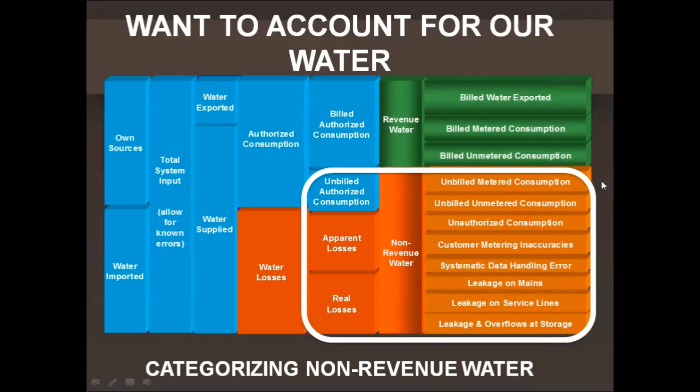So why do we care about real water losses at all? Well, one reason is limited water resources. About a couple of years ago, about 40 out of the 50 states were in a water shortage or drought condition. Many states are still in drought today. It kind of depends on the state whether you're in or out of drought, but most states at one time or another experience a limited drought, some a longer drought. Because water resources can be limited, we really want to make sure we're not losing very much water out of our system.

We can have hazards related to water losses from our system if water's leaking on the surface—we can have ice, ponding, or hydroplaning that might occur. So we want to try to prevent those kinds of things from happening.

With the increasing costs of producing water, including our increased energy costs, it costs us a lot of money to make our water, so we don't want to just waste it out the pipes in our system. We want to make sure we keep as much of that going to our customers.

There can be water quality impacts related to leaks from our water system. If we have any leaks in the system and then a pressure reduction happens, we could potentially suck something into our pipes—we don't want to do anything like that. So we don't want to have any water quality impacts from leaks, or if we have a major pipe burst in our system that collapses and something falls into the pipe that way. We want to try to prevent those kinds of things from happening.

It can be an inconvenience to our customers if we get a major leak—we might have to shut a lot of customers off, block the street while we fix it, and the street may be out of service for a while. And finally, damage to property or other utilities. As the water loss occurs, if we get a catastrophic failure with maybe a sinkhole or something, we could have damage to a road. We might have damage to sewer pipes or other utilities in the same area as our water utility, or damage to personal property.

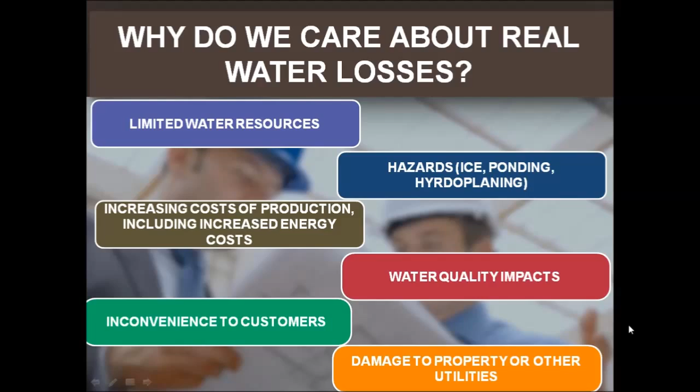Real water losses come in three different categories. First, leakage on mains—this is all the pipes transporting water around your system, moving it from your wells or surface water sources to your tanks, to your industrial, residential, and commercial customers. All that piping network moving water around your system would be considered your mains. So the first part we're thinking about is leakage in any of those types of pipes.

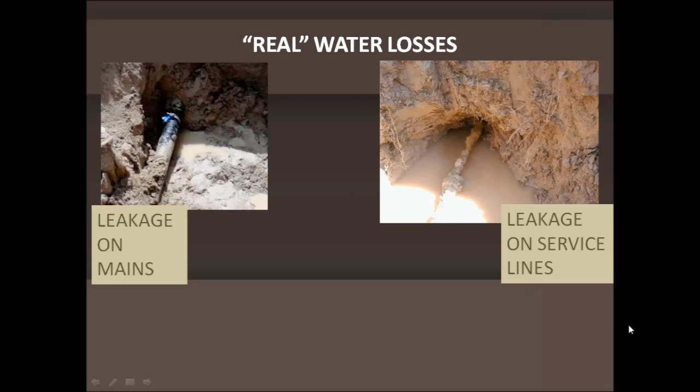The second is leakage on service lines, and in this case we're thinking about the pipes that connect your mains to your customers, up to their meters. So we're not thinking about what happens from the meter back to their house—that's a whole different category that doesn't actually show up in this type of balance.

But we're talking about what connects your mains to the customer meter. And then finally, the last category is leakage or overflow at storage tanks.

Leakage or overflow at storage tanks is a little bit different than leakage on pipes, so we're not going to spend much time talking about this today. We're going to mostly focus on the pipes. It's also handled in a different way.

If you have an overflow at a storage tank, you want to make sure that you think about why that's happening. Are you overfilling the storage tank because maybe there's something wrong with the equipment that's telling you what height of water is in the tank? Do you have some operational problem, a design problem? Is there a malfunction in the tank? You want to try to investigate what's going on with that tank so you can stop the overflows and the loss of water that way.

If the water's leaking out of the storage tank through some structural problem, there's a hole in the tank, something like that, you really want to address that because you don't want any holes in your storage tanks. That's a very dangerous thing and could be a public health protection problem where you don't want anything from the outside washing over the tank and getting into a hole in the tank and then getting into your finished water supply.

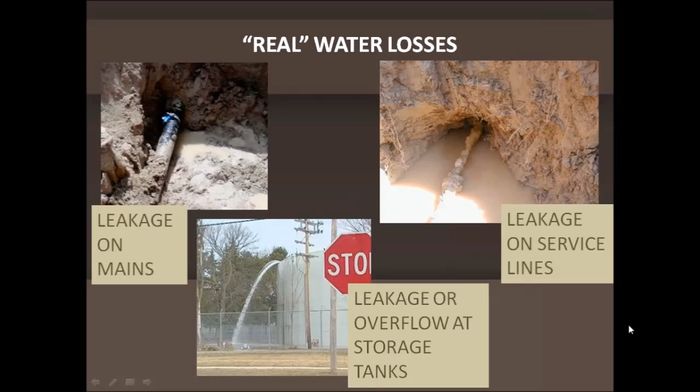So again, the storage tank would be handled a little differently. The overflows, you want to look more at the design and operation of the system, the functioning of your level detectors and things at your storage tank, and the leakage at your storage tank, you want to just inspect the tank very thoroughly. You want to make sure you really have a tank that structurally has good structural integrity and no leaks. So handle that sort of separately. And the rest of the discussion today is going to focus much more on leakage on mains and leakage on service lines.

So the different categories of water loss, we want to think about what our total water loss amount is. And this is real water loss, not that whole non-revenue water. This is just the real water being lost to our system. So we call that the current annual real losses, or CARL, C-A-R-L. So that green box is sort of representing all the water that's being lost to the system.

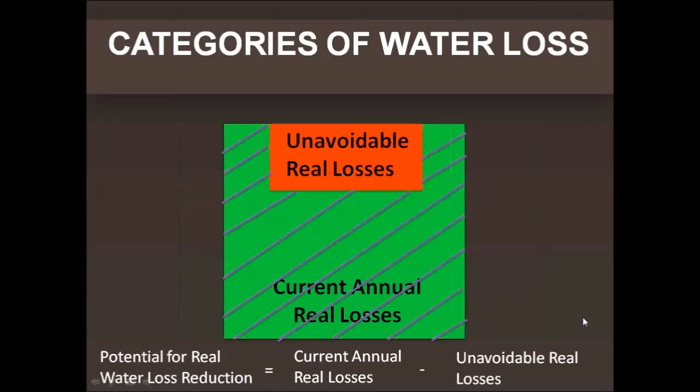And then within that green box, we have something we call unavoidable real losses. These are the losses that we feel like we cannot remove, and we'll talk about what causes unavoidable real losses. So what we actually have a chance to do something about is the area that's sort of hatched in the purple lines. So if you look at all of this area out here, outside the red box, this is all the potential to reduce the real water losses.

You have to go in and look at your particular situation. How much does it cost you to produce that water? How much does it cost you to, or what are you selling that water for? What would it cost you to reduce the losses? So you can do a cost-benefit analysis and say, it would cost me this much to reduce it, and it would save me that much money if I did, so what's economically justified?

And it's always available to a system to do more than what's economically justified. If you're in an area where water resources are very, very precious, you may go well above the economic level just because there are other reasons you're justifying it. But it's important to remember that there are these different levels. There's the current losses that encompass the whole real water loss. There's the unavoidable real loss that we really have more difficulties dealing with, and then there's what's economic to reduce.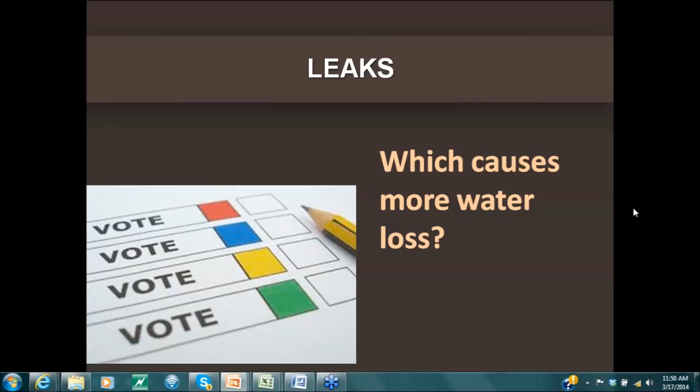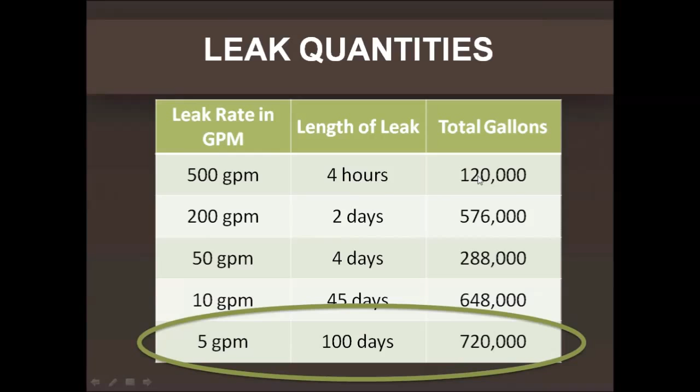So what many of you figured out is here's the leak quantities if you actually do the math. If you look at your 5 gallon per minute 100-day leak, it produced a water loss of 720,000 gallons, whereas the very major leak, although it's huge, it was a short duration, so 120,000 gallons was produced out of that loss.

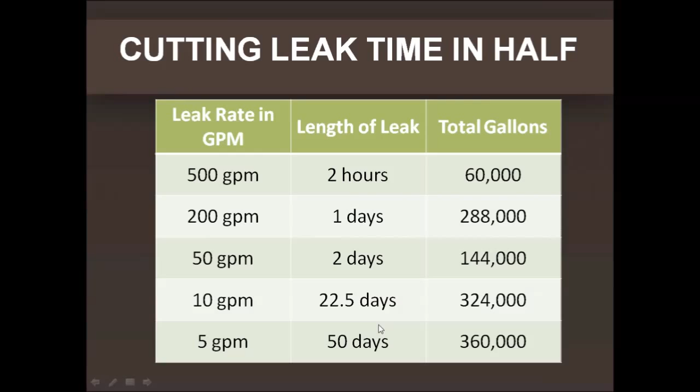What this is all about is looking at if you could cut the leak time in half, how much water could you save? If we could respond twice as fast as before, each one cut down in half, we could actually save 1,176,000 gallons for these 5 different break types. So the point here is if you respond faster, you do have the potential to save a lot of water loss. We really want to make sure we can respond as quickly as possible to the breaks that occur, because ignoring a slow leak because we think it's a small matter and it won't make that much difference—we want to change that thinking.

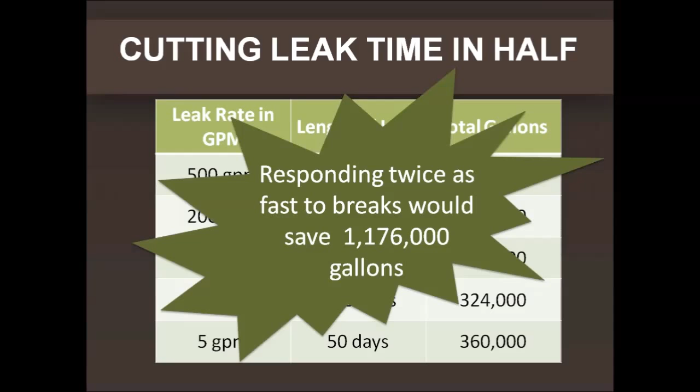So another poll question is, what reasons do you have for why you haven't repaired leaks sooner? What kinds of things happen in your system that make it more difficult for you to make repairs in a timely fashion? You can select all that apply. So we have maybe small leaks that don't matter that much—you think, if it's a small leak, we don't really have to get out there very fast. Or insufficient staff, inadequate resources, maybe we don't have enough money or equipment or supplies. Maybe we have other priorities, prioritized by myself or management, where you have other things you have to do and can't get to water losses. Or you have a large water supply, meaning you have a lot of resources and you're not too worried about water losses because you have that big water supply. So take a few minutes and click the ones that you think best describe your system and why maybe you don't fix leaks more rapidly.

Okay, so it looks like some of the biggest reasons are insufficient staff, which I can imagine is a very big reason because a lot of systems are really short-staffed. Inadequate resources, lack of money, or other priorities—those seem to be things that we hear a lot of in lots of other contexts as well. But those are major things that often prevent us from doing other parts of our job.

So we can go back to the slides now. Maybe think about if your system has a lot of smaller losses and it does take you a long time to get out to fix them, maybe think about what kind of case you might be able to make to have a more rapid response. Maybe you can make your case to your decision makers, the people that have the budget in hand, or your managers, the people who tell you what to do during the day, to make a case for getting out there a little faster.

So the kinds of things you can use are: small leaks adding up to a lot of water—we talked about that in the prior poll about how important it is to realize that small leaks can add up to a lot of loss. Your system integrity is compromised as long as you have leaks going on, so you want to try to fix them as soon as possible to avoid any problems related to public health.

We want to avoid a more serious and expensive repair later. If we fix it now as a small leak and do it quickly, we might be able to avoid a much more expensive repair when a sinkhole occurs or a catastrophic failure occurs, because some research has shown that many of those catastrophic losses start out as a very small leak and then grow bigger. So we want to try to fix them before they grow bigger. And it's less expensive to repair pipe than to replace it—if we get out there sooner, maybe that can help us avoid having to replace pipe.

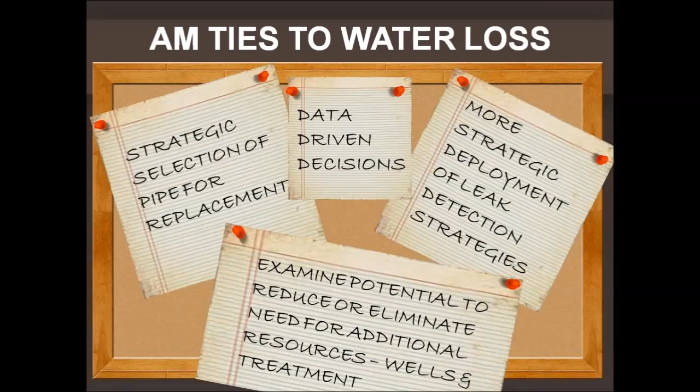So the asset management ties to water loss are pretty strong. We take away from the asset management process that data-driven decisions are really important. We'll focus a lot more on that in webinar 3, on how you use the data from your system to drive decisions on what to do to reduce water losses.

It can also help you with more strategic selection of pipe for replacement. So rather than going in and replacing a whole big swath of pipe or a certain area of pipe or certain type of pipe, you can actually be very strategic, and it can save you a lot of money if you can really strategically select those pipes for replacement based on your data.

You can also use it to have a more strategic deployment of leak detection strategies, thinking about what's the best expenditure of funds to achieve the greatest results I can with my leak detection strategies. And again, that will be discussed pretty heavily in webinar 3.

And then examine the potential to reduce or eliminate the need for additional resources. So maybe you're looking at putting in a new well and need treatment for that well, but it turns out if you reduced your water losses significantly, you could avoid having to put in that new resource or that new well. That could save you quite a bit of money if you can look towards things like that. So sometimes you can look at the potential that maybe you can avoid having to spend money on a particular asset and make the case there.

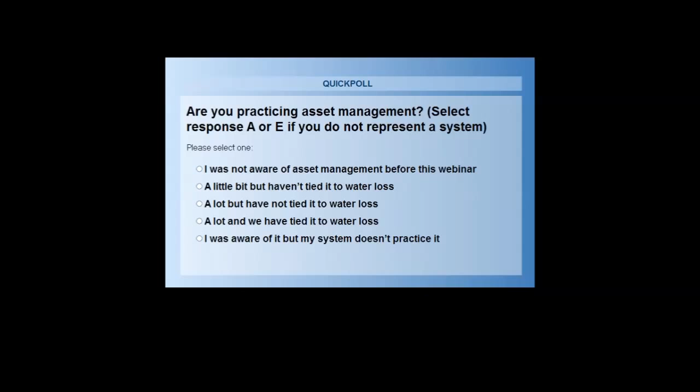So a poll question on whether or not you're practicing asset management. If we could go ahead and open the poll. Okay, so you have your choice of selecting which response best fits you. If you're not representing a system, you can either choose answer A or E.

So I was not aware of asset management before the webinar. We've done a little bit. We haven't really tied it to water loss. We've done a lot, but we haven't tied it to water loss. We've done a lot, and we tied it to our water loss program. I was aware of it, but my system doesn't practice it. So choose the answer that best reflects where you are right now with your system and what your asset management practice is like.

Okay, we still got folks clicking in, so I'll wait a few more seconds before closing the poll.

All right, so we have many people who are aware of it, which is kind of nice. If we would ask this poll question a few years back, I think that answer would be a lot lower, where people weren't even aware of it. We have two groups, about 20% of us, that have done a lot. Some have tied it to water loss and some not, but that's really good to hear that we are starting to see a little bit more asset management practice occurring. So that's really good to see. And then 11% not aware of it. So I might recommend that if you're in that category and you want to learn a little bit more, there's quite a bit on the EFC Network website about it. And you can always contact us about where to get resources and whatnot to learn a little bit more about asset management.

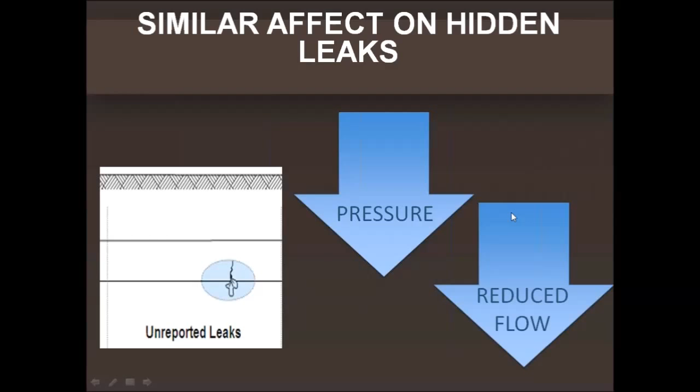And depending on how much background leakage you have, this can be very dramatic. There are certain parts of the world where they've had unbelievable reductions in water losses by reducing the pressure. Places where they've had maybe not the best construction, long run lengths of pipe, and they've had a lot of background leakage, and they've dropped the pressure either all the time or just at night, and they reduce that background leakage quite a bit. You can also have a similar effect on your hidden losses. If you reduce your pressure, you will also reduce the flow out of those hidden losses, the ones that you don't see. And finally, if you reduce the pressure, you'll actually get fewer breaks of the reported type as well, and fewer of the dramatic breaks.

Now, there are some considerations with reducing the pressure. One is many states, if not all, have a minimum pressure that they require just for public health purposes, because you don't want the pressure in your pipe to fall too low, because then you might suck something into the pipe. So they usually set a pressure minimum of possibly 20 or 30 psi. So you need to make sure that you're well above that minimum pressure to maintain public health and safety with your pipelines.

But what we're talking about is you don't need to be maybe up around 80 or 90 psi. Maybe you can drop it down. But what you want to look at is your particular system. You want to see if you have one pressure zone or many. You want to see if you might be able to reduce the pressure in a given pressure zone or throughout the whole system. You might want to think about, could you reduce the pressure at night? Again, you have to maintain that minimum pressure, but is there a way to reduce a little bit of the pressure at night to reduce the losses that occur then? You have to look at your system and see how realistic it is for you.

Do you have pressure reducing valves in your system? Do you have pumps that can be throttled, using variable frequency drives to change the pressure? Or would you actually have to swap out your pumps or do something else to reduce the pressure within your system? And then how automatic is the control of your pressure reducing valves? It may not be that easy for you to reduce pressure at nighttime if you don't have automatic controls on your valve. So you do have to look at your system, but it's something you definitely want to investigate. If you're running at a relatively high pressure and you have a lot of water leaks, you may be able to reduce that somewhat by reducing the pressure in your system. So at least take a look at that and see if it's a possibility within your system to have an impact with pressure reduction. You do want to make sure, again, that you're maintaining the minimum pressure and that you're providing enough pressure to make sure that the customers are getting what they need at their household.

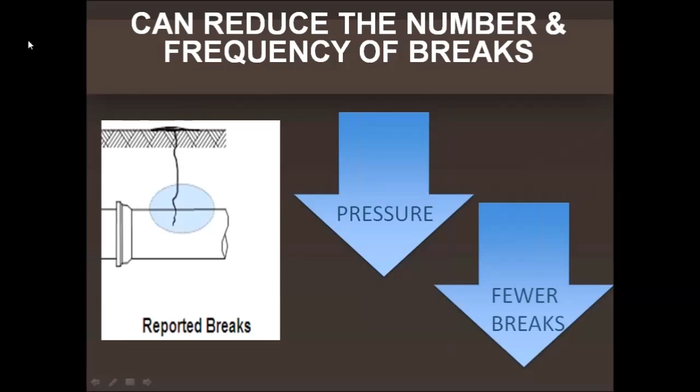So we have a question now about pressure management. Do you do anything with pressure management in your system? Your choices are, and you can check all that apply: you've reduced pressure throughout the system to reduce losses, you've reduced pressure in some pressure zones to reduce losses, you've reduced pressure at night, you've experimented but not fully implemented it yet, or it does not apply because you do not represent a system, or you've just never done anything along the lines of pressure management. So choose the one that best fits your situation, or choose the ones that best fit your situation if you've done more than one of these things. Go ahead and click.

Okay, so we haven't done a whole lot with pressure management. There's a few that have experimented, a few that have reduced it in some pressure zones. So we're not doing a whole lot with pressure yet. I'm not terribly surprised because I don't think the practice of pressure reduction is all that commonplace in the United States, but it is becoming increasingly more common throughout the world, where people are using this as a very good technique to address those background losses, because it's really one of the best ways to take care of that particular problem. Okay, we can go back to the slideshow now.

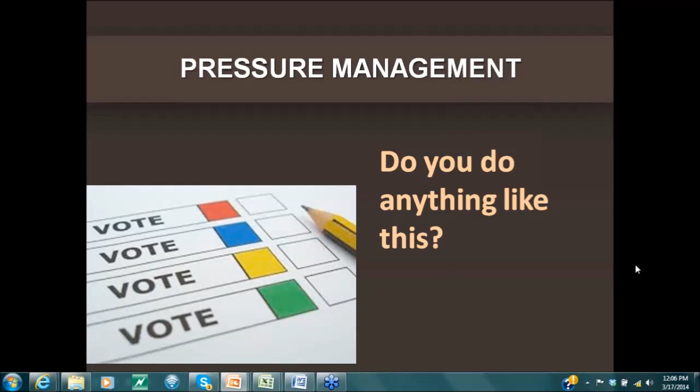Because we've done some work in this area trying to figure out whether leaks would always surface and how many were actually observable versus hidden. And we even watched a couple of leaks that were very low volume leaks for a number of years to actually see if they would ever surface. One, I think, was 2 years and one was about 1.5 years before we decided to finally fix them. And they never did surface, never caused any problem. There would have been no way you would have known it was there without looking for it.

So the kinds of things that keep them hidden are stuff like fractured bedrock or highly permeable soil, or other things like water going into a drain or a sewer. We actually had one where the water pipe had a hole in the bottom, and it had actually drilled a hole in a sewer pipe that was down and over from it, and there was a hole in the top of the sewer pipe, and the water was going into the sewer. So until something catastrophic happened to the sewer, we probably wouldn't have found it because it wouldn't have caused a sinkhole. But eventually it might have caused a problem in the sewer pipe, and we probably would have found it that way. But it's the kind of thing you're not necessarily going to find soon, or at all maybe.

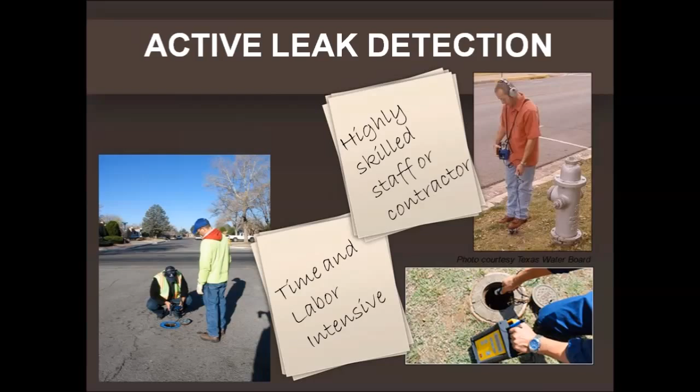This has a magnet. It could be put on a valve and taken off. And essentially what happens is the device listens in the middle of the night. It listens for the noise at, say, 2 o'clock in the morning, and then if it hears a noise, it stays on. If it doesn't hear a noise, it shuts off for the night.

If it hears a noise, it'll come back on at 3 a.m., listen again. If it hears a noise at that point, it will listen again at 4 a.m. If it hears a noise then, it'll go into alarm mode.

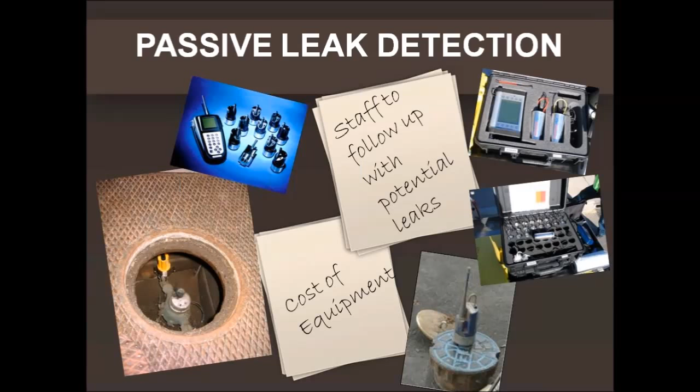And then it takes a person to come back and pick up the alarm signals, see what equipment is in alarm, and then determine which 2 points seem to bracket the noise or where the noise seems closest to. And then you have to follow up with those alarms. Just because this device or that device or any of these devices goes into alarm mode doesn't necessarily mean there's a leak there. So it does take staff to follow up and make sure there's a leak.

So when you're considering active or passive, neither one is a panacea. Neither one will find everything you're looking for. They have pros and cons, and we'll talk a lot more about this in webinar 3 about why you might choose to do one or the other. In the first case, active listening, you're paying more for the person who's going to look around. In the second case, passive, you're paying for the devices. And it depends on how long the devices stay in service and how you use them, whether or not it's cheaper for you to use a person or the devices.

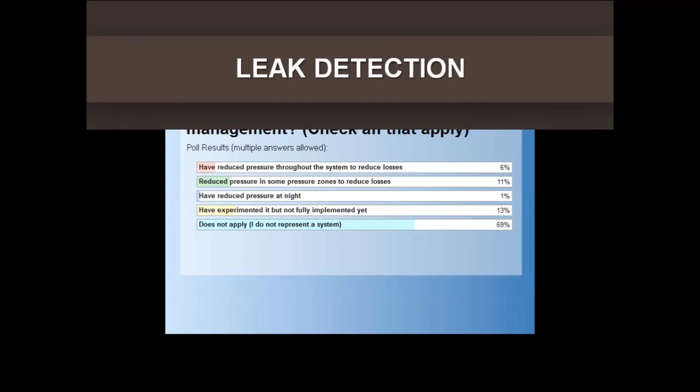So have you done any type of leak detection? Have you hired a company to do leak detection? That means active leak detection, hiring a company to walk around and do active leak detection, or hiring a company to do passive leak detection. Did you buy equipment to do active or passive leak detection? Or have you never done leak detection, or you don't represent a system? Take a moment and pick the ones that apply.

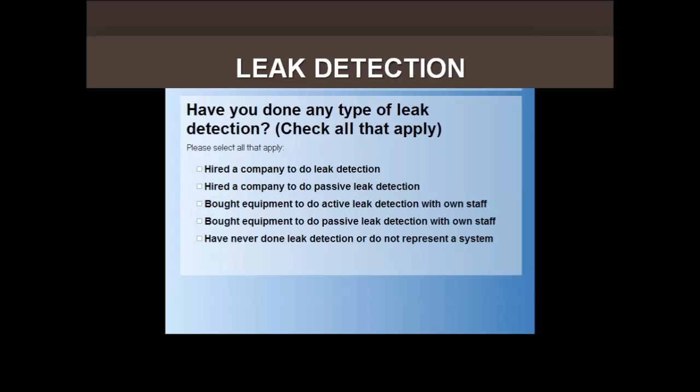Okay, so we have many that have never done leak detection, 68%, and then we have some that have hired somebody to do leak detection, and some that have bought equipment to do it with their own staff. We'll talk a lot more about this in webinar 3 about how you make those choices about which of these strategies to apply and how to apply them to your individual situation.

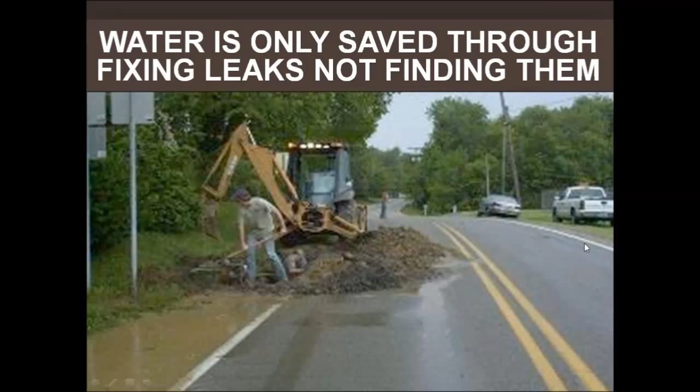Okay, so one last thing about finding leaks: water is only saved through fixing leaks, not through finding them. So really think about the capacity you have to fix leaks. If somebody goes out and finds you 30 leaks, could you actually fix them? Do you have the staff, the equipment, the time, the resources to actually invest in fixing the leaks? Because if you don't have the ability to fix the leaks, it's not worth investing in finding them. Finding leaks is not saving water. It's fixing the leaks that's saving water.

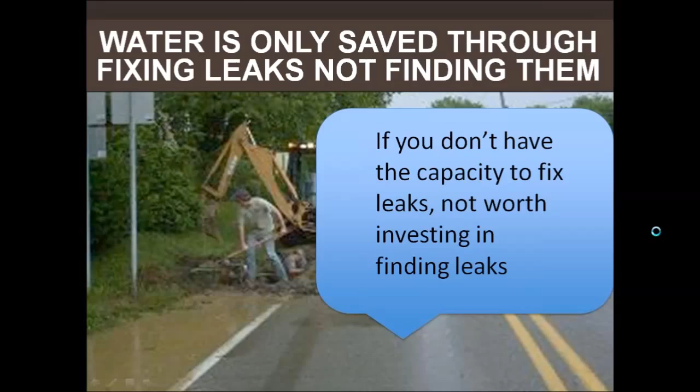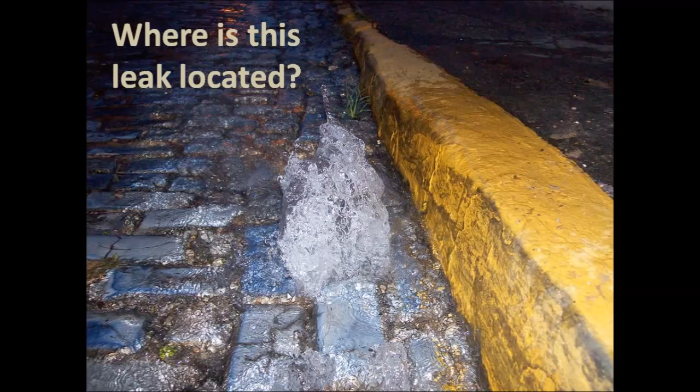So when we get into pinpointing, one of the things we think about is where's the leak located? This is a picture I took when I was doing some asset management training in Puerto Rico. I was walking along and I saw this water bubbling up through the street, and you could tell there was a leak in the pipe. But you don't know where the leak is. The leak might be right underneath this, but it might not, because water is going to seek the path of least resistance. It could run along the pipe and then come up at another point. So you can never be absolutely sure that when you see the leak surfacing, that that's where the actual leak is occurring. So we have to do what's called pinpointing the leak.

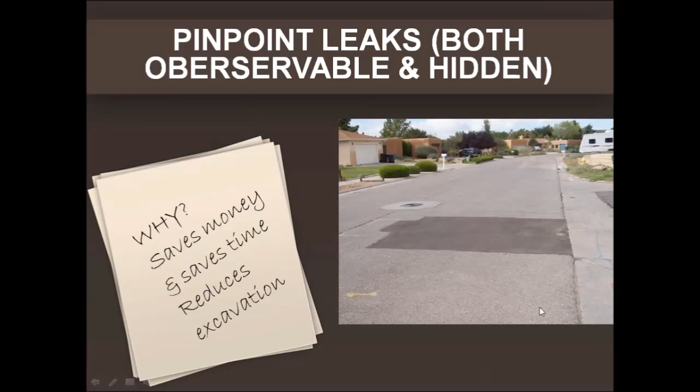We use pinpointing on both leaks we can observe and ones that are hidden. It's even harder with a hidden leak because you have no clues whatsoever. But in both cases, we want the ability to pinpoint where the leak actually is occurring. Why might we want to do that? It's going to save us a lot of money and time by reducing the amount of excavation we have to make. If we can have a nice small excavation like is shown here, it can save us a lot of money instead of having to dig up a whole big section of the street. That could save us a lot of money and time.

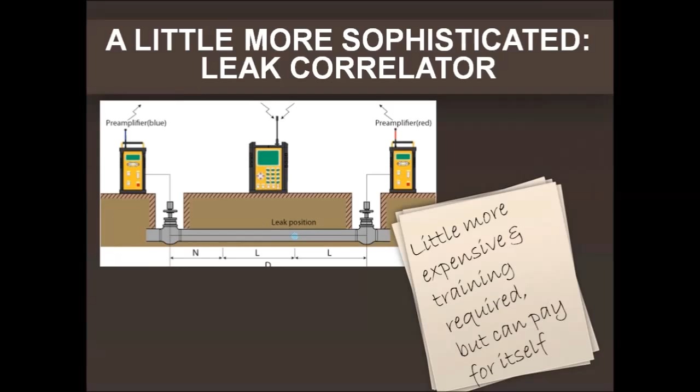If you don't know so much of that information, it can be a little bit challenging because it'll throw you off, since you might put in the wrong pipe type or size. But this is a really good piece of equipment to help you locate those leaks. It is expensive and you need some training, but it could pay for itself in several different big excavations.

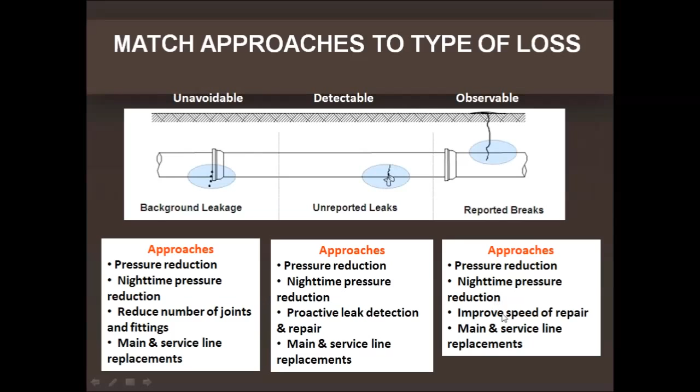This will pay for itself by limiting the size of that excavation. So keep in mind that although it's expensive, you can save money in the long run that can help pay for it. So we want to match our approaches to the type of loss that we have. We go back to our unavoidable, detectable, and observable categories. For unavoidable loss, we're going to do pressure reduction and reduce the number of joints and fittings in our pipe. Occasionally we'll have to do main or service replacement when the background leakage gets too bad. For unreported leaks, we'll use many of those same techniques, except we'll add in proactive leak detection. And finally, for the observable leaks, what we're really interested in is improving our speed of repair to cut down on the water loss we have.

Strategic deployment of those 4 different strategies, and how you make choices within your own system, will be the focus of webinar 3 - what considerations you have, how you should make those choices, and what kind of information you need to collect. That's what we'll talk about on the next webinar.

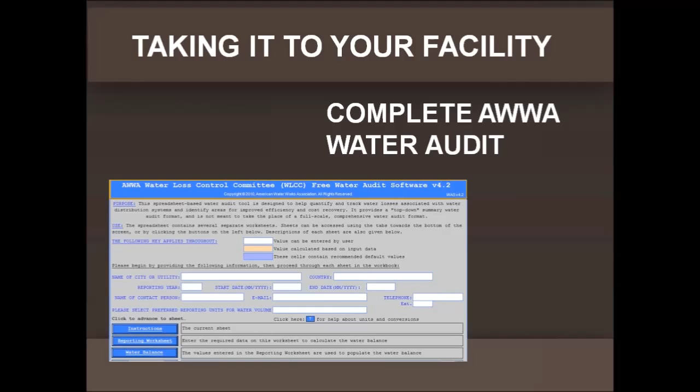So to finalize the discussion, we'll talk a little bit about doing things in your facility. Develop a team, people that can help you get this done. Complete an AWWA water audit to try to see what kind of problem you're actually having and how bad it is.

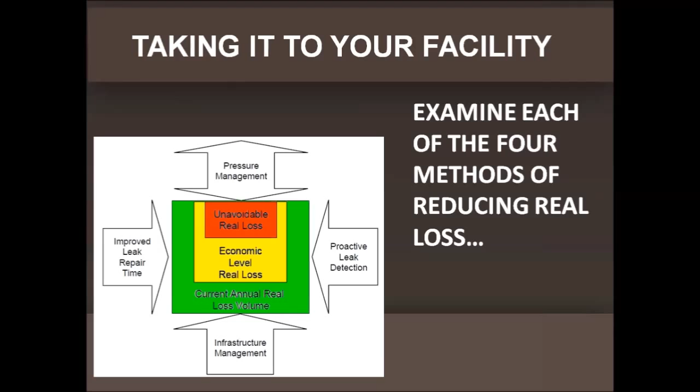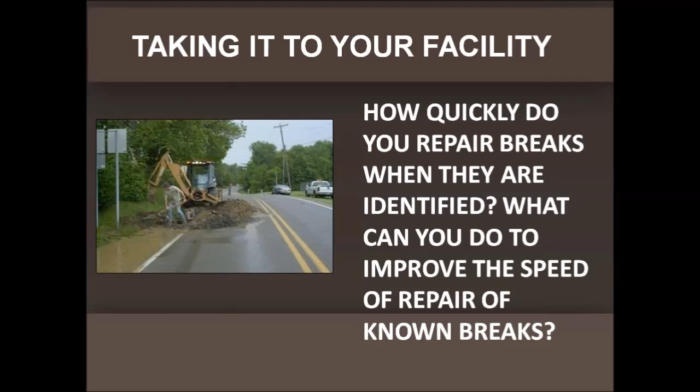Once you've done the audit, look to see if your problem is real water loss. Is that a big issue for your system or not so much? How big is that water loss problem? Because that will feed into the strategies for what you do, once you know how big of a problem you actually have. Then you want to examine each of the 4 methods of reducing real loss.

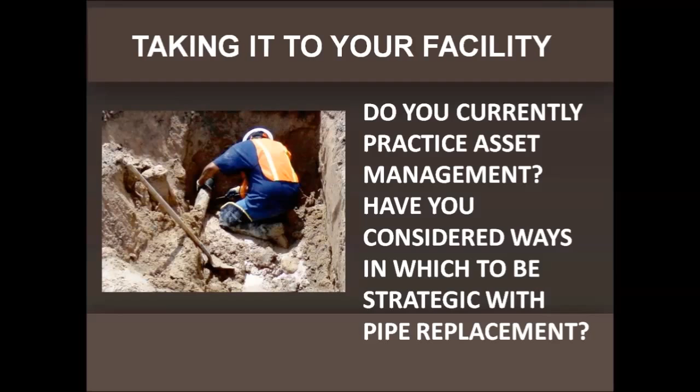So how quickly do you repair breaks when they're identified? What's the length of time that it typically takes you? What could you do to improve the speed of repairs? Could you get more staff, more equipment? What could be done? Do you currently practice asset management? Have you considered ways in which you could be more strategic with your pipe replacement, which again, the more strategic you are, the more money you save - and that can be poured back into your program, your system.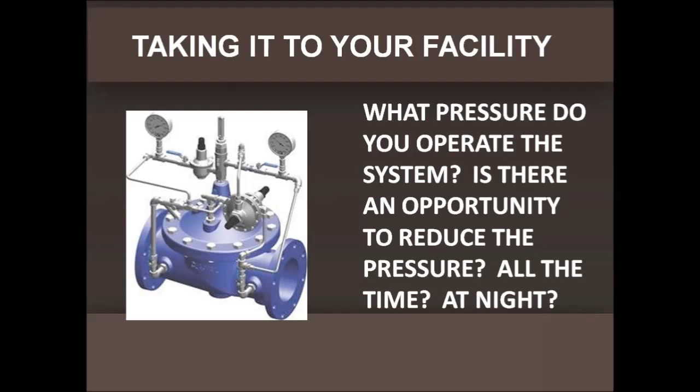What pressure do you operate the system at? Is it a very high pressure? Is it a moderate pressure? Do you have any opportunities to reduce the pressure? Could you do that all the time? Could you do it at night? Could you do it within pressure zones? So just investigate what the operating pressure of your system is and what can you do about it.

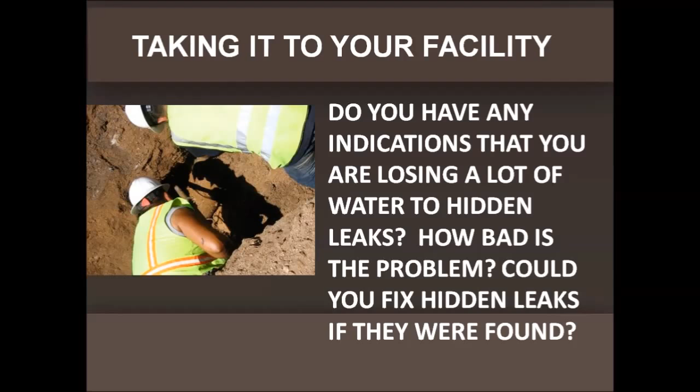Do you have any indications that you're losing a lot of water to hidden leaks? If you have a lot of real water loss, but you don't experience a lot of observable leaks, that's a good sign that the loss is hidden as opposed to being able to be seen. So that would tell you that maybe looking for leaks is a good thing to do. But you have to ask yourself, could you fix those hidden leaks if somebody found them? Would it be possible to fix them?

And then finally, just tune into webinar 3 to learn more about how to figure out within your own system, how to think through that process of what makes sense to apply to my system - which of those 4 strategies, or what combinations of those 4 strategies, makes the most sense for my system.